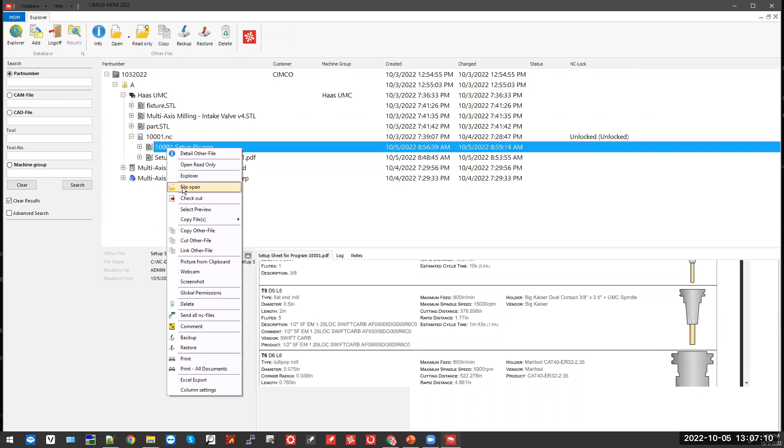This allows everything from an operator, setup person, or programmer standpoint - whoever it may be in that chain - all the data is right here at their fingertips. They're not having to flip through different pieces of paper, worrying about leaving one at the machine, losing one, or it being coolant stained. Everything is within the database and accessible from a number of different client computers.

Again, based on the user and the role they're going to be logging in as. We're trying, especially with Industry 4.0, to get the information documented in some type of repository, and then allow the setup personnel, the programmers, the operators - whoever it may be - to get that information without having to look at something, have a bunch of questions, and go to the programmer who's already busy, or maybe he's left or on vacation. Everything can be stored right within here.

So with that being the case, this is the part number that we would have. With that being said, obviously I see a preview here, and we certainly have a log as far as it goes as well.

So it tells you who the user was, at what date and time. We can put in different comments as far as maybe what was changed, when it was checked out, when it was checked back in. And of course, we keep those revisions, so that way you can go ahead and get back to an older one if ever needed. But that way we have one main part file—this is the approved one at the time being.

Getting into more or less security compliance and different standards there, a lot of companies will end up having just one program on the CNC machine at a time, and that's the approved program. With all the traceability and documents within the software, you can get a full picture of what that looked like when it was sent to the machine, when it was uploaded, why it was uploaded, and the full traceability behind that.

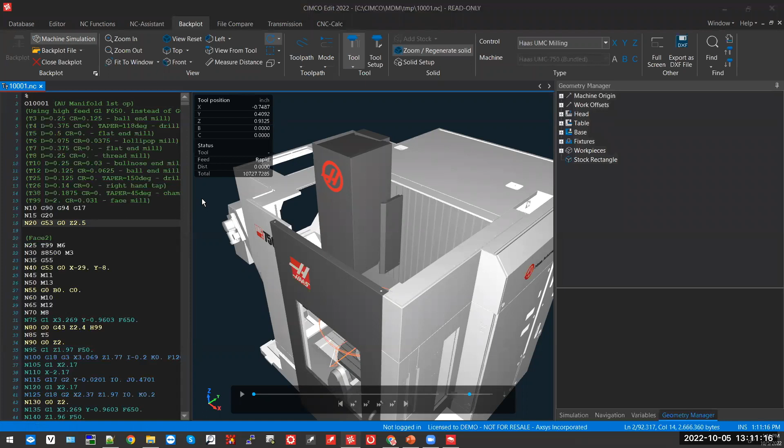Now, in this particular one, I do have a purposeful collision being shown, and the only reason is because when I loaded it up, I removed a base plate that was in the sample file. That way we can see how that would look specifically.

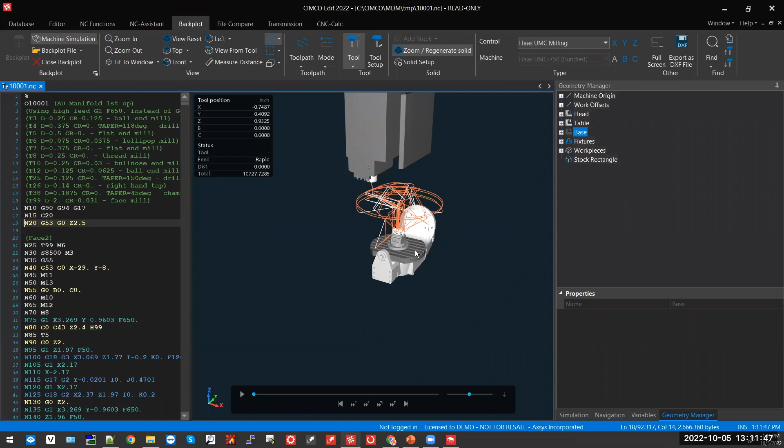So if I bring it into my machine simulation module, which is an add-on for the editor, you can see this one's going to be on a Haas UMC 750. To make things a little more clear, I'm just going to turn off the actual machine housing and just see the important pieces here. Whenever that's turned off, we are still collision checking against anything else as far as the housing, travel limits, whatever it may be—it's just that visually we can see things a little better and nicer now.

So with that being the case, here's kind of my idea: obviously my platter of the machine itself, my fixturing built up with it, my raw stock and everything as well. If I wanted to do a quick simulation and a quick check, I could simply go to our simulation tab over here. You can see in the lower right, it's just doing a quick calculation, maybe spitting out anything that it thinks would be an issue.

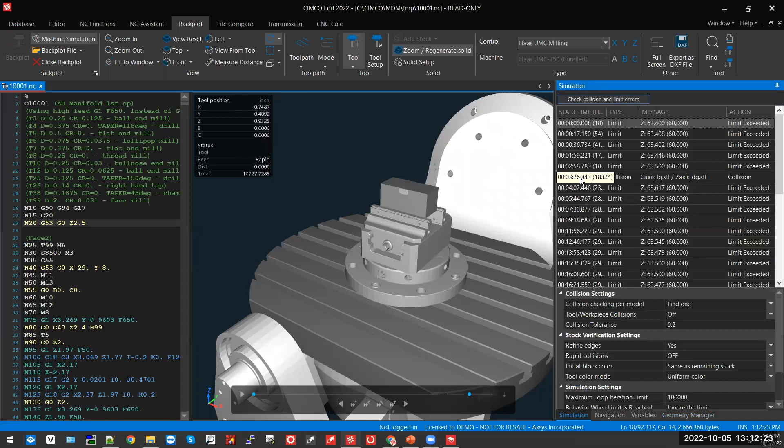The big ones are certainly going to be the collisions. So what that looks like is if I click on it, you can see that it's going to bring me to that collision itself, list basically the line number that it's going to be on, and show me exactly what is going on.

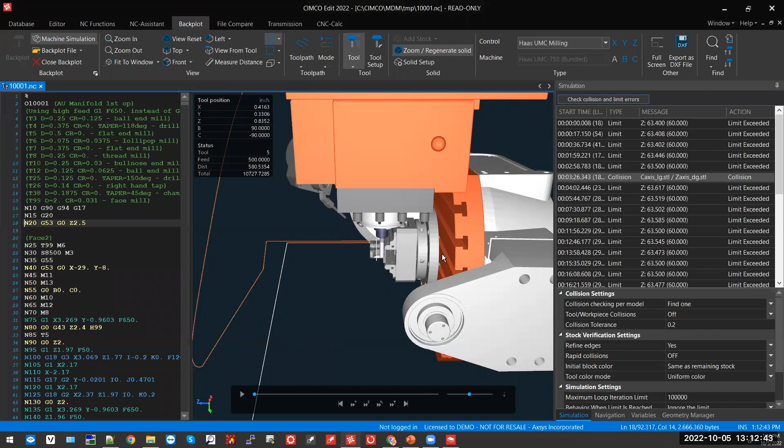As I mentioned earlier, I've removed an extra fixture plate here, which is sucking this down closer to the table and causing a collision. Obviously to fix it, I can see everything within the simulation before even loading it to the machine, trying to single block things through. Come to find out, when it's tilting up or coming in on the Z-axis, we are in fact going to have a collision, and you almost have to tear down your entire setup again just to put that bottom fixture plate on and raise it up a little more.

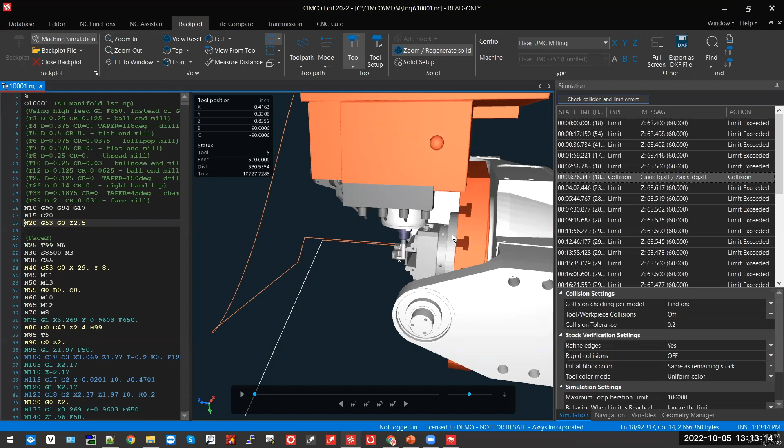That's why I wanted to show that here within the software itself. Outside of that, we could play that through as normal and see exactly what's going on there, so we can simulate everything per the CAM file as it's spit out, reading off the G code.

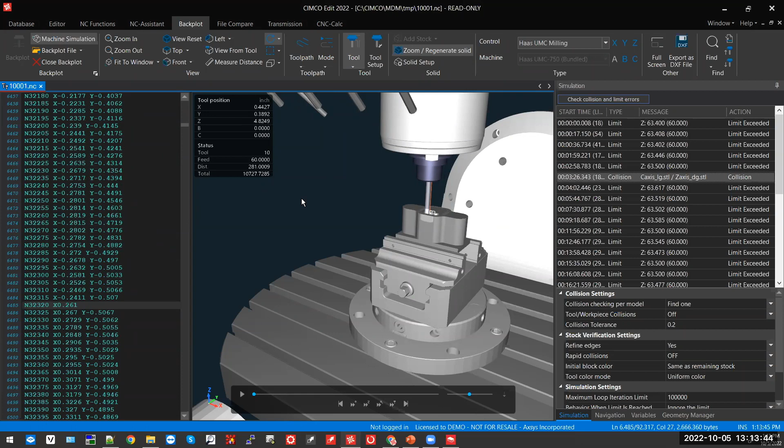Once we have everything proven out on this side of things and I'm happy with it—if we needed to make any changes, we could certainly do so within there—go ahead and close out and maybe even check back in that file as well.

If you have multiple files opened up here, we could go up to some of the other options to see what files are checked out, either by yourself or from an administrator standpoint. If you wanted to see who's working on different files, you'd be able to see that from a top level overview here as well.

That's also nice because if you were to take a file home for the weekend and work on it, or at night, whatever it may be, there are different ways we can check back in a file if needed—if the user's not present for a week or so because they went on vacation, whatever it may be.

The other thing to note is getting into the compliance side of things. There's different things we have capabilities for as far as status handling and workflows within here. Right now this particular file is unlocked—it's in an approved state, so it's ready to be sent to a CNC machine, no reason to hold it back from anything.

However, we can set up different workflows in different states here to maybe lock a file, for instance. That way, if a file is sent back from a CNC machine to the database, that's where that import queue message came up initially. A file was sent back to the database, and it wants someone of authority, whether it's a programmer or whoever's part of those groups and permissions, to check with that file, do a file comparison within the editor, find out what changes were made, and approve or reject that file.

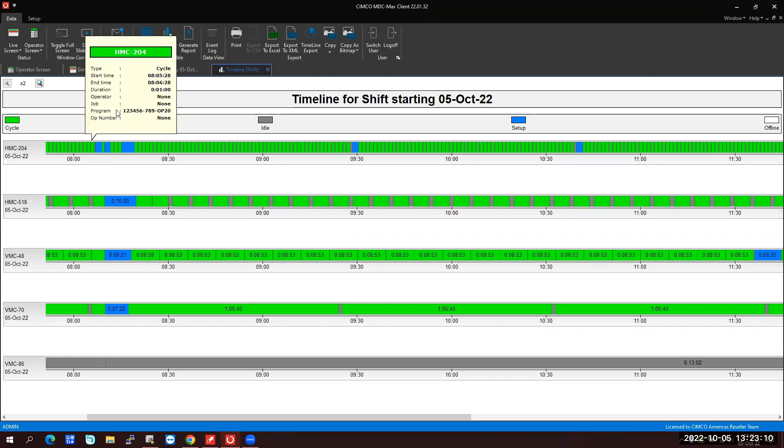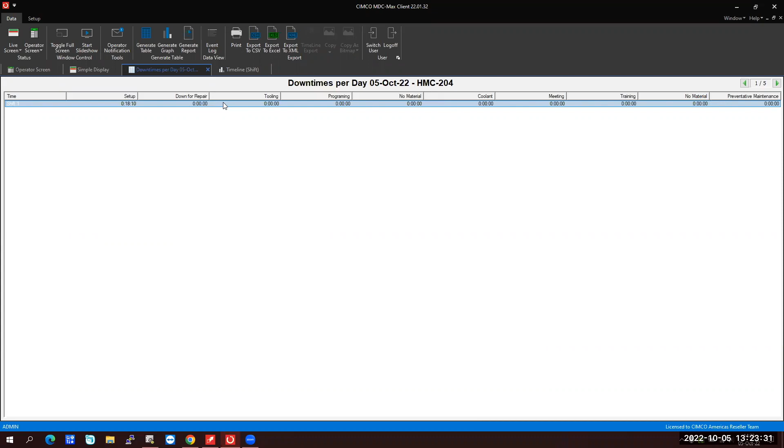Another type of report would be our downtime, like a table where we can break everything down. This shows shift 1. So far today, this machine has been set up for 18 minutes and 10 seconds, but there's been no other downtime for that machine. So it's been running as you would expect.

We have a live status screen here that will give you the status as it is right now in the system. So right now all 4 of my machines are running, that's green, and the 5th one is still idle.

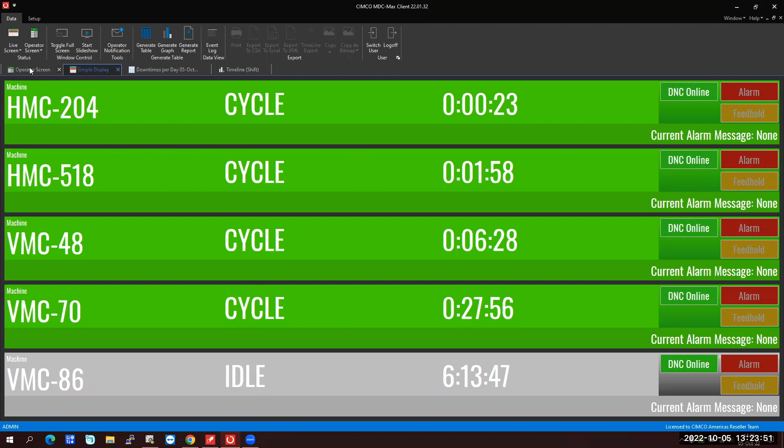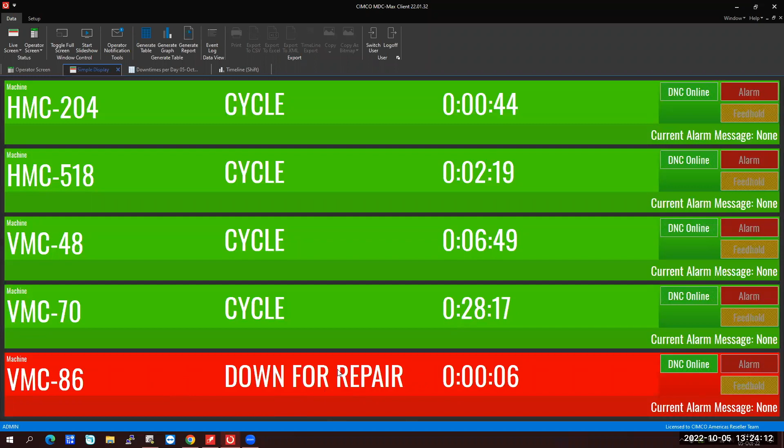And should any of our machines be down, let's play with the one that's idle. I can pick through an operator panel here to say why it's down. It's down because it needed repair. As I change that, this will automatically update in real time. And if I look at my timeline for today and zoom out, you can see down at the bottom it's starting to show that machine is down for repair.

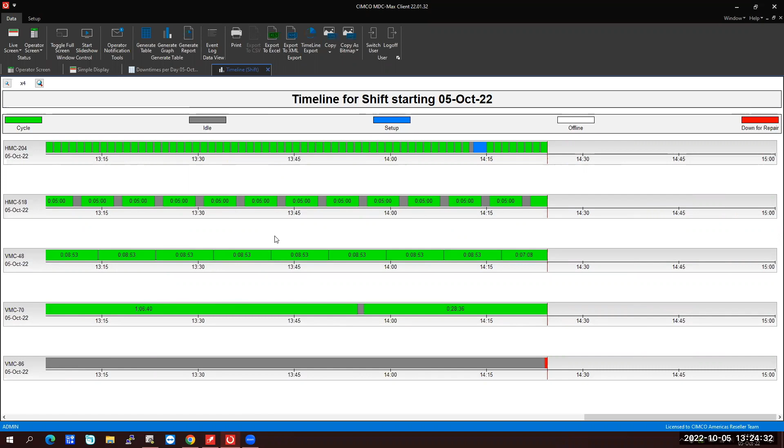What you're looking at here is what I refer to as our thick client. It's the Windows PC based software that allows you to do reports like these timelines and graphs, or timelines and tables. But the live status screens, your operator screens, or simple display as I call it here, is also available to look at through a web page, which I can show out here.

So if I back up and look at my VMC 86, you can see it's down for repair. Through this web page I can control it as well as through the thick client. Now the advantage of this is you don't have to install software on the shop floor to utilize these. It's available through a web page.

Now when I say web page, that is local to the company's network. It does not get out to the internet. It's all protected and behind their security. So the only way to access this is through their network, through a VPN connection, or our cloud link option that we are starting to offer.

So let's go to the display. Here's your live status display, giving you all your machines again, how they currently are. And then an additional feature through the web pages is you can look at a dashboard. I apologize for some of the values on here, I was playing around with my system and kind of messed it up a little bit. But you get the idea here.

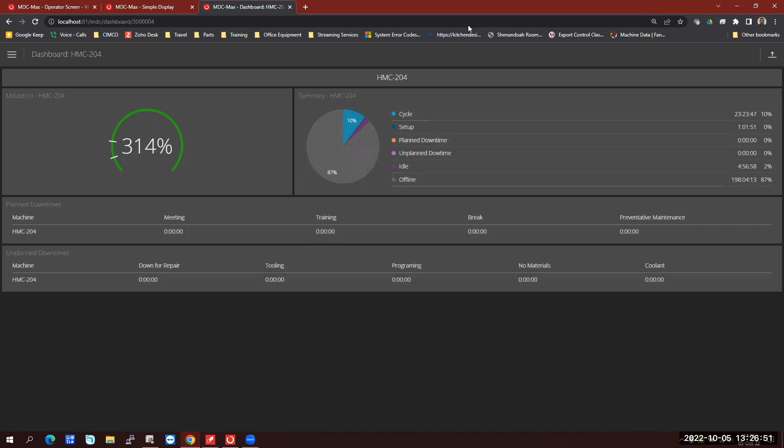So with that, I don't know that I have much else to say other than it's live reporting and gives you live status of your machines through our thick client. And here you can do different tables and graphs and get historical data from that. This generate report feature is basically allowing you to create a custom list of graphs and tables from the same timeline or same time period, so you could generate one report with a bunch of tables or graphs inside it at the same time, instead of doing a bunch of individual ones.

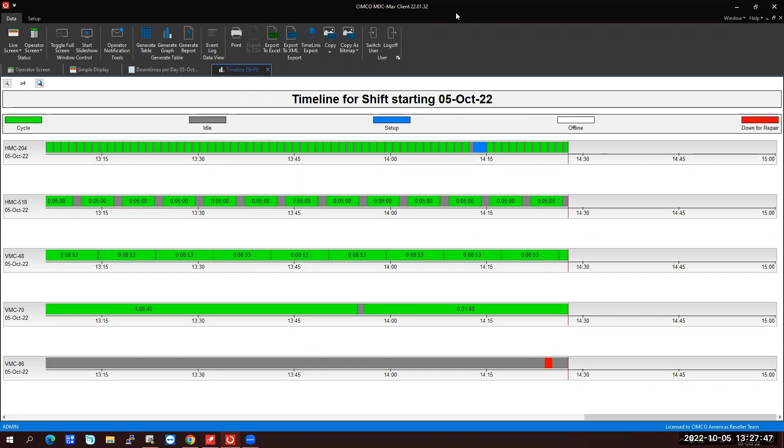So with that, I'd like to turn it back over to Joy, or open it up to discussion if anybody has any questions.